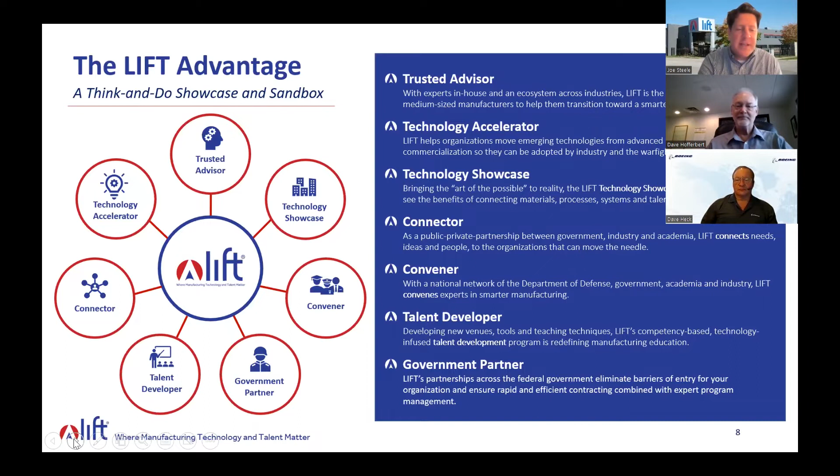Connector and a convener, thanks for joining us today. That's why we are here, to bring the best and brightest minds together. Talent developer, we already touched on that, but again, making sure the advanced manufacturing pipeline is healthy and robust moving forward. And finally, a government partner. It can be intimidating or overwhelming for folks to begin working with the federal government. Dave Hofferbert from Bond might be able to comment on that. But we like to serve as that conduit for folks to begin working with the federal government.

So that is Lift in a nutshell.

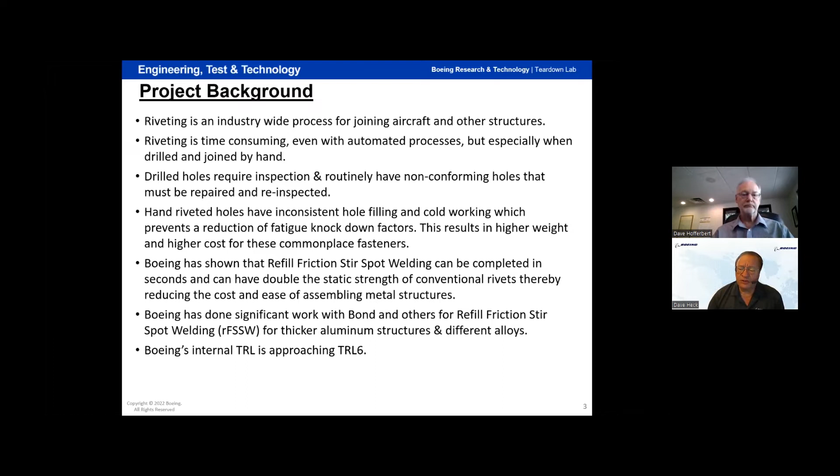Let's see. So our project was, we want to look at other applications that are more military focused. Again, there's lots of places on lots of airplanes, F-15, all the helicopter programs, and some of the military derivatives like the P-8, which is a 737 derivative, and KC-46, which is 767. So what we wanted to do was find a target component that we could actually transition this technology to.

So in the ranking of parts that you use as candidates, you usually start with doors and removable things for your first entry level transition. That way, if something goes wrong with the process, even though you've vetted it and done all the testing, they can just take it off and put a new one on. And then you go into secondary structure, and then into primary structure, and then you get into that higher criticality level stuff.

We don't really think friction stir spot welding will be in anything in the critical section, because those are usually titanium or stainless steel or other fasteners.

So we did development of weld parameters. We really wanted to check how fast we could go from weld number 1 to weld number 2, 3, 4, 5, and 6. We'd seen some data from other partners that have worked with us, including Bond, who's worked with us for a while, just to see how fast we are. Some of the previous data we saw was maybe 6 seconds per weld, which is close to how fast we can drill holes with an automatic machine, but we certainly cannot go back and rivet those holes, even automated, in that total amount of time. So right off the bat, it looks like it's at least equal.

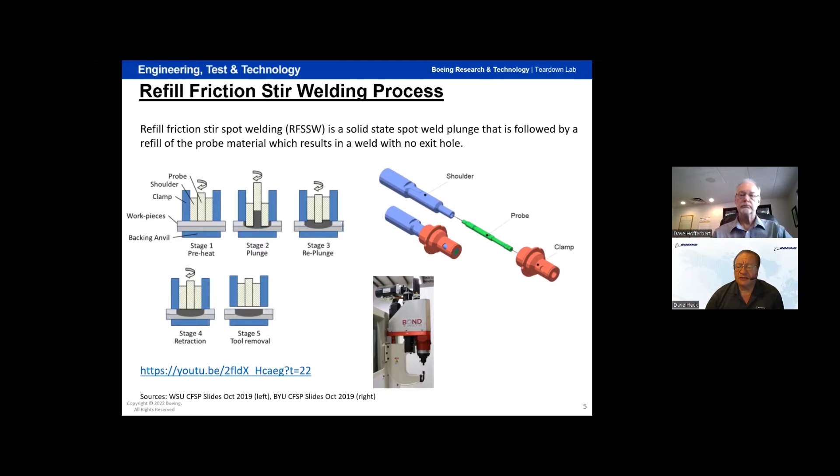But it's got obviously rivets all over the place. It's got some pin and collar, like nuts and bolts kind of fasteners too, but the ones we chose were obviously the ones that are just regular rivets. We looked at other applications too, again looking at low criticality parts—doors that come on and off, metal flaps, etc.

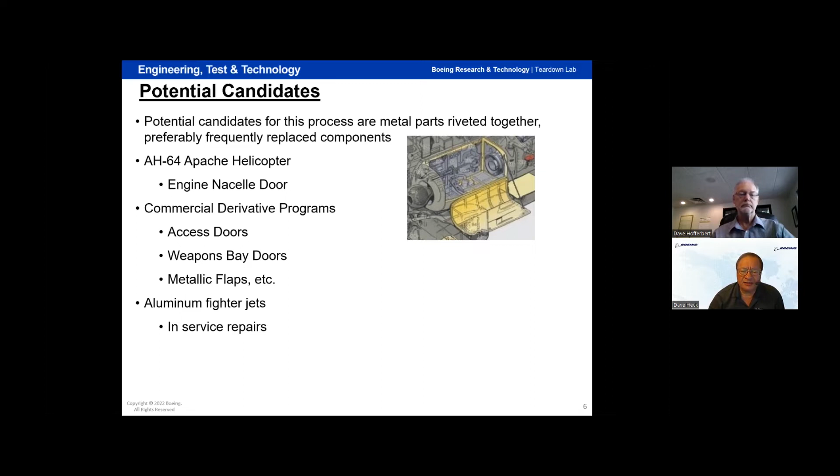There's also some teams looking at in-service repairs of aluminum skins on fighter jets and whatnot, where you can go in and just push a new piece in and not only do the weld, but also fill any cracks or anything like that. But that wasn't part of this.

So again, I kind of talked about this a little bit. This part's double contoured, so when we do it, it's going to need to be robotic. A little bit of a challenge, but we're pretty sure we can do it—we've done all kinds of things with robotics.

The outer skin assembly—you're looking at the actual inner skin, but once the door is closed, just the outer skin has 516 rivets, which really isn't very much. There's hundreds of thousands on commercial airplanes, so the more rivets you can get to, the better. So if we show a positive business case with this, then other portions of the structure of the helicopter open up as possibilities, as do other aluminum helicopters like the Chinook.

So I'm going to pass this over to Scott because this rapidly gets out of my wheelhouse with this.

So Scott, go ahead. No problem.

As we're doing this program, it's a smaller, shorter program, so we wanted to quickly get a bunch of details out of it. We used a design of experiments to throw a bunch of parameters out there and figure out what the best options were.

Rather than just doing a single spot, we made it on a 10-spot coupon, so we can see how these plates manage as we're going down the length.

So we used 4 variables. We either skipped 1 spot or 2 spots to let that heat dissipate as we were welding. Then we used the RPM to adjust the heat input. We looked at different plunge depths to see how far down we're going into the lower sheet, which can affect both your lap strength and how much heat you're putting into the surface. And then a tamp depth, which is, after the initial weld, you push down a little bit just to make sure everything is solidified and gives you a nice clean surface at the end.

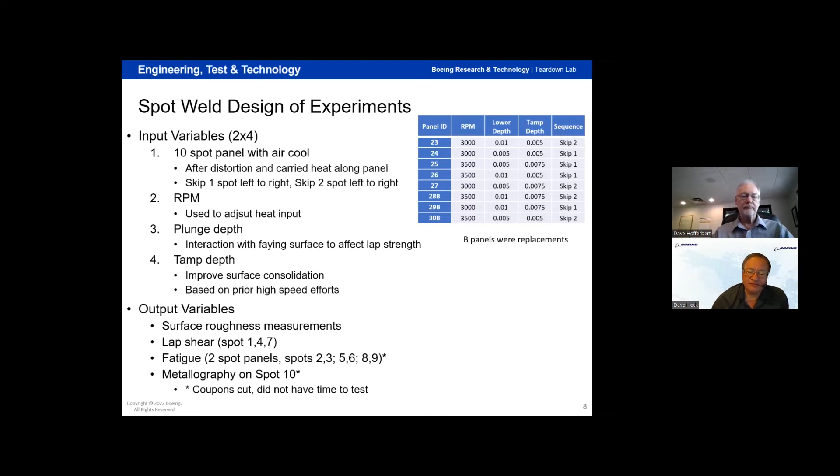Okay, there you go. Oh, look at that. So as Dave was mentioning, these are 7075 and 2024, but very thin. You have 50 thousandths thick for the total thickness where you're putting the weld or the rivet.

So these were done with a 9mm, or 0.354 inch diameter, tools that were spaced 1.2 inches apart, with an edge distance of 0.6. We're trying to keep a lot of the same parameters when you're doing a rivet replacement, so keeping an edge distance, looking at your overlap and your spot spacing. These all equate to at least 2D and 2D for edge and sheet overlap, as well as a 4D spot spacing, again for a 032 to 020, so pretty thin material.

So it can be susceptible to a lot of the other properties that we're messing with. Just to showcase, as we're stepping down to do the lap shear and the fatigue.

Go ahead, Dave. And those sizes that Scott mentioned, the edge distance being 2 times the diameter and the rivet spacing being 4 times the diameter, that's typical values for aerospace assemblies. Twice the diameter edge distance gives you the best fastener bearing stress allowables.

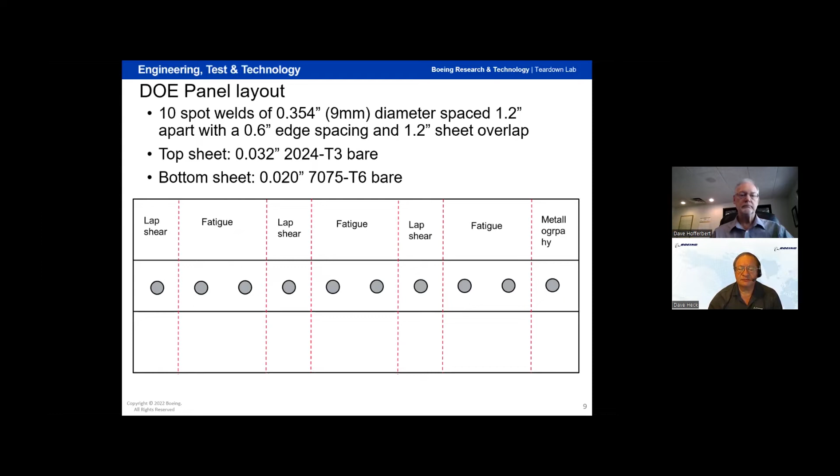As mentioned a couple of panels back, we did have to do 3 repeat panels, so we were doing these in rapid succession, one after another. We did get some buildup on the tools, which caused the touch point to be off. This is doing research and trying to push it into full scale production really fast, so you see some things like this, but we were able to go through a procedure and make sure.

You can just see what the tools look like, both cleaned and before they got cleaned. But we could do this in process as well. So those final 3 panels were able to be run without any issues, just running some additional cleaning trials on the tool itself in process.

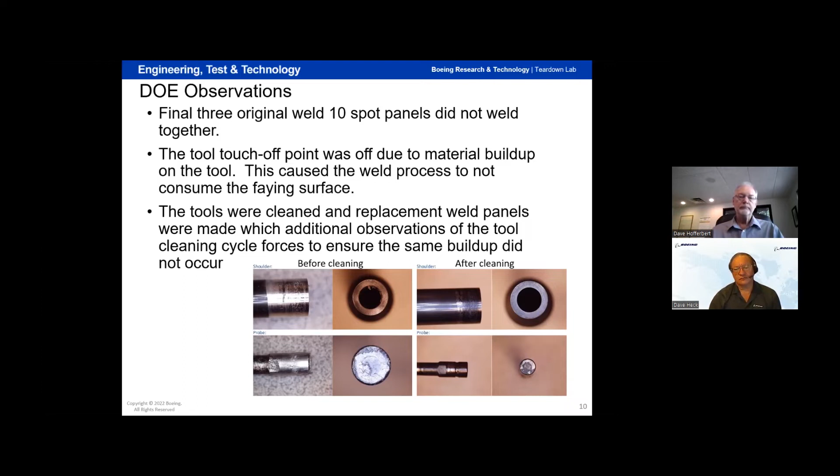So we were able to, starting with the surface results, surface roughness, we measured the bottom sheet, the bottom of the bottom sheet, which would be equivalent to the side that sees the air flowing past it. We measured the surface roughness both in the length of the weld and across, so we do essentially a plus sign on the back of the weld.

All of them were within 125 microinches, which is a typical requirement. Most of them were under 63 microinches, and even under 32 microinches. So pretty much as flat as you would have a normal sheet that would be delivered to you, sitting around at 32 microinch surface finish.

Running through the statistics, we didn't have enough panels to get interactions, but none of the variables we looked at really drove one way or the other for surface roughness. So if anything, we just saw there was no buildup - as we went panel to panel, we didn't get heat buildup to cause extra surface roughness. It was good to see that it was not affected, but we could still get surface roughness that met what the blueprint requirements were.

And then for lap shear, we were able to do the first set of panels. We were able to get all those pulled for the lap shear strength. The repeat panels were unable to be pulled before the end of the program, so we weren't able to do a full statistical analysis. But even looking at what we did get, we got at least 2.7 times stronger than the blueprint riveted joint.

And if we throw out a couple of those panels that didn't perform as well, we were able to increase that average up to 505 pounds per weld. Quite a bit of a jump in the shear strength of these, and these are material to material - no rivet head there to help you, no actual rivet there. So we were able to get some pretty good strength out of this process. But we weren't able to get the fatigue or the lap shear testing completed for the statistical analysis.

So another thing we did, we wanted to talk about speeds. How fast can we go? One thing we were trying to do is, how fast can the individual spot welds go?

Bond's process engineer worked on that and tried to increase the speed. He was jumping up the individual feed rates of different parts of the spot weld up 10%, 25%, all the way up to 100% - so full 200% speed of what he was commanding the machine to do. These travel speeds, 420 millimeters or 240 millimeters per minute, were the feed rates for the individual plunge sections of the weld.

I didn't really see any differences in the forces that were being exerted on the tool or the surface finish on the backside. If we go to the next slide...

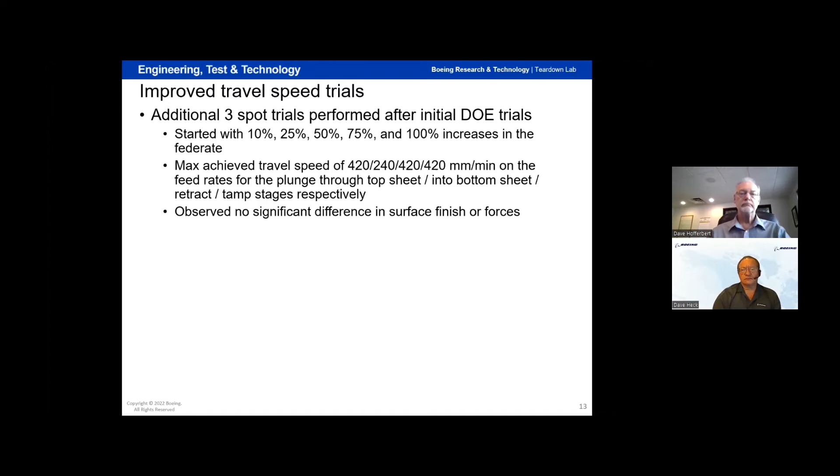What he saw was that the original DOE welds were about 1.2 seconds long start to finish - once you start plunging until you're pulled out of the part, was 1.2 seconds on those first DOE welds. When he increased to 200% speed, he got that down to a whopping 0.98 seconds. So we did get a 20% increase in speed, but again, it was still about a second long, which was much better than the 6 seconds or so that we had stated earlier.

A lot of what your time is going to be is going from spot to spot. So positioning the robot and putting it in the next spot is going to be more of your time than the actual spot weld itself.

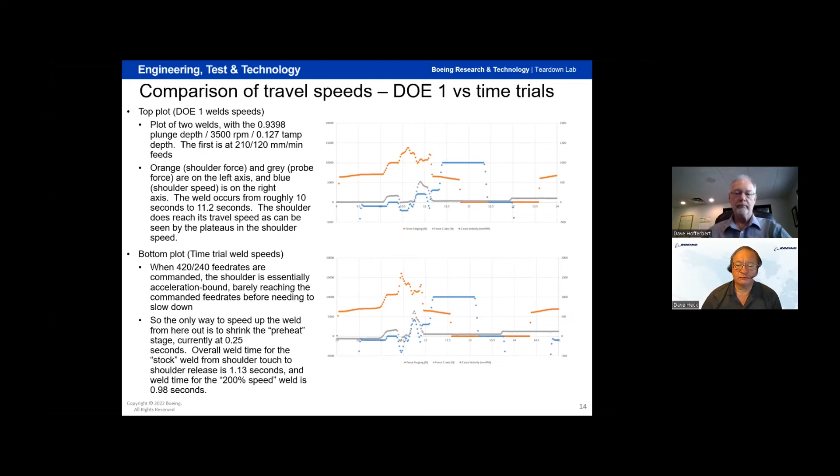Okay, so back to me. One other thing about that discussion, or the statement Scott made about the robot speed.

Typically, these holes aren't very far apart. So if you look at the 4 times diameter spacing, if the hole is 0.35, 4 times that is 1.4 inches. So the robot doesn't have to move very far. We don't expect that to be more than 2 seconds.

So looking at that rate, clearly we've drastically reduced the time it takes to rivet. We do it much faster than it takes to drill a hole. So I think it's got a lot of potential for further work and applications all over the place.

So anyway, I made a cost model for this. Part of my time, in addition to being a metallic processes application engineer, I've been spending time helping a team we call the Teardown Lab, which does the same kind of thing automotive companies do. We buy products from those other guys, and also our own products, and take them apart, look at them, see how they're designed, how they're fabricated, and then do cost estimations to see where their cost really is and compare it to ours.

If theirs is cheaper, why is it cheaper? If ours is cheaper, why is ours cheaper? And what the design benefits are.

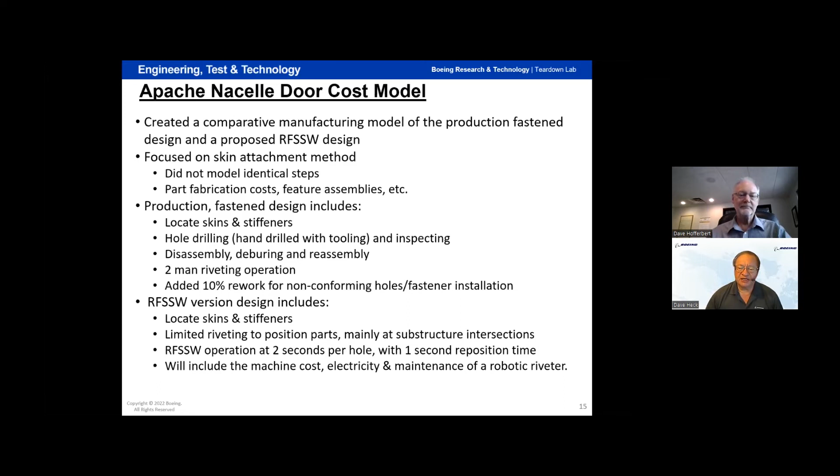Especially the discount rate that Bond's going to give us when we buy these from them - but the cost of robots, electricity, maintenance, everything that goes into the true cost of that device. So the method we use during our teardown cost modeling is very much bottom up. We look at washers, rivets, everything you do to make that part, including inspection and NDT and that sort of thing.

So for the riveted version, we had an internal tool that lets us estimate how much it takes to load particular parts in the fixtures, how much it takes to drill, deburr and everything else, and then install the fasteners. So for this case, the assembly cost for those 516 holes was

$2,170, which isn't a big number. If you're making 200 of these, it becomes a little bit bigger number, but for this limited part, it's kind of what we expected.

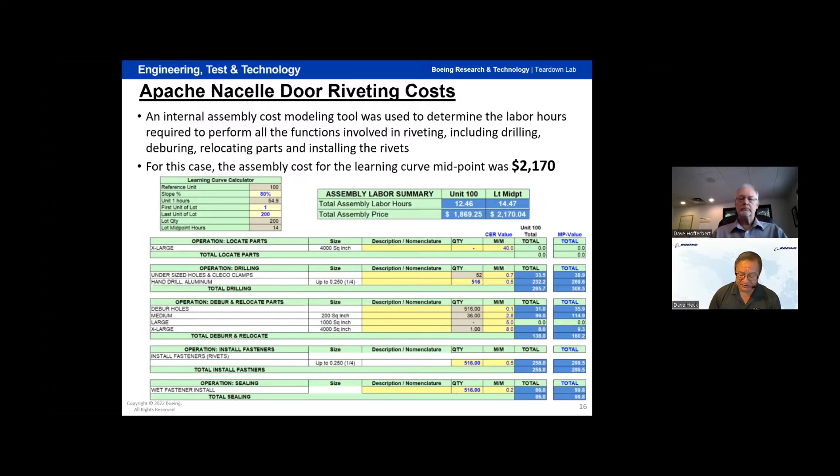We roll all this information up into, excuse me, another program called Cleansheet, by McKinsey. That lets us look at specific operations and break them down piece by piece.

Again, you can look at if it was a part you're going to machine - there's a certain amount of material, a certain number of cutters at a certain cost, and a certain amount of setup time, and run time, et cetera. Then go into the inspection part - penetrant inspection, sealants, priming, and everything else that goes into making a part.

So we can specify where the machines are, what machines they are, custom machines we can customize, all kinds of stuff. So we get a really good output from this that we can change if we need to, like logistics and profit and all those other percentages. So it's a pretty good tool.

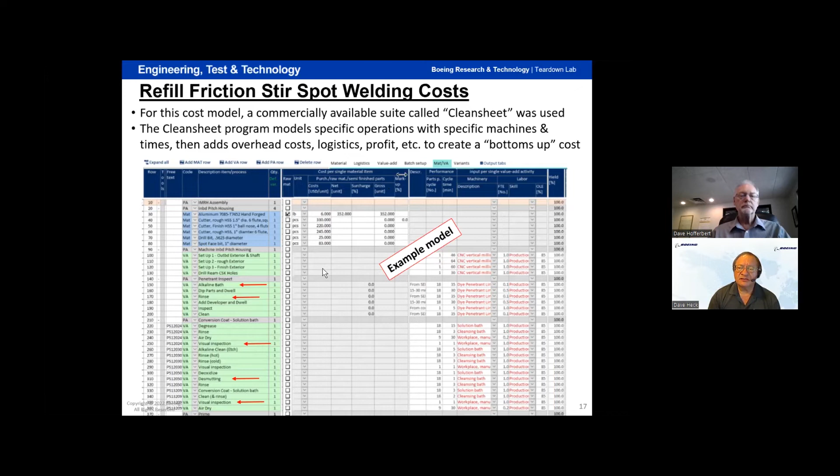So again, we looked at a weld rate a little bit faster than I said before, of 1.5 seconds, or a little bit slower - sorry, 1.5 seconds per weld plus a reposition time.

For the robot, we used a higher end automated drilling robot, and this is the specs on the robot. So total cost is $2 million. That's really crazy high, but still, this is what the software gave us, and we could go in - we didn't have time to go in and modify that to get quotes and that sort of thing. But the next system in the database below this one was well below what we needed - didn't have the lifting capability, and certainly couldn't put in the right amount of forging force.

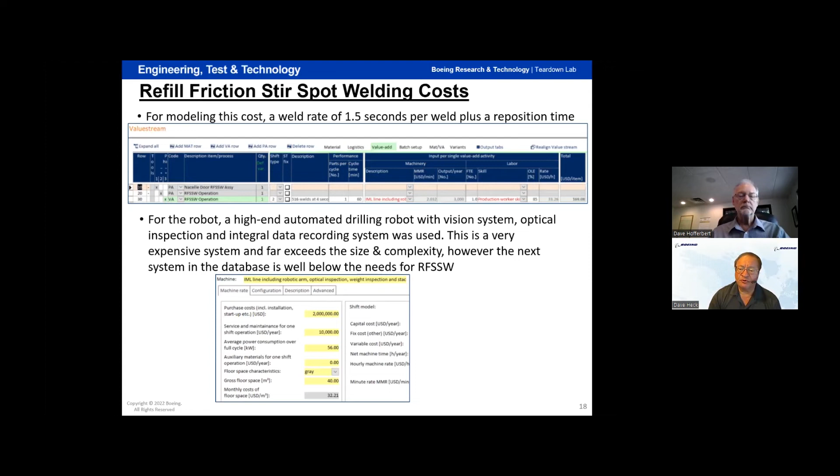So when we broke it all down, this is the way we show this. Basically, everything on this side of the chart is built up to the direct manufacturing cost, what it actually costs to do that work in whatever facility, before you start adding on all of those overheads and that nasty profit thing.

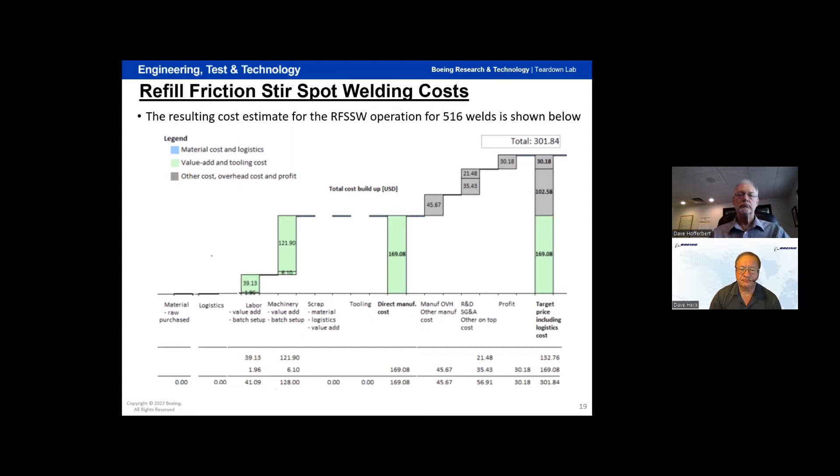But it gives you an idea of where the money is coming from. You're actually spending less money on labor and more money paying off this $2 million machine. If that machine was a quarter the price, this would come down also, because it's the amount of time you're actually operating that machine. Anyway, the bottom line came up with a total of just over $300, which, considering you're moving 2.5 seconds a hole, is pretty good. That's a pretty good rate.

So we look at the total cost of adding the welding tools to it. We came up with a total savings per aircraft, for one door on the left and one door on the right, of $3,700. And for 200 aircraft, that's $750,000. That's not too bad.

Non-recurring cost, yeah, we've got to put robotic equipment in, plus the outrageous cost that Dave Hofferbert is going to charge us for that friction stir welding head, and then time to actually program the machine to go do it. So total program savings we estimated was $650,000, which is a pretty good number for just 516 rivets.

If you look online, you can see illustrated views of the Apache, which is the one with the pictures of the door. You can see all the rivets in the tail and other places, so there's thousands of rivets. So this number could get to be $3 million per ship. Well, that's a big number.

That's a good savings. Now, granted, we make our profit based on a certain percentage of the sales price, and there's a federal limit to how much we can make. But most of our helicopters go to foreign sales, so if we can cut the price by a couple million dollars, that's going to mean we'll sell a lot more. So that's the reason why we do cost reductions, because our profit would actually decrease a little bit.

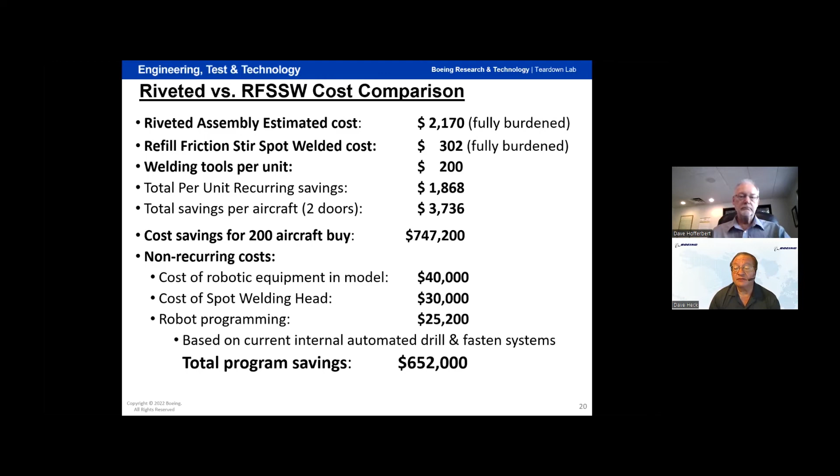So let's see what else I have here. A few more comments on the model. Rivets are pretty cheap, a few dollars a pound, and there's a lot of rivets in a pound. But again, as we talked about, in the tail boom skins there's over 3,000 rivets.

So we're usually looking at 2 million savings for that. And then there are other places around that aren't as highly loaded, like the skins around the cockpit area. Anything where you get near the engine, then things get sky high.

Static loads, and the other thing we didn't really mention is the whole fatigue environment of a helicopter. In addition to the flight loads, which usually determine your fatigue spectrum, there's also that constant thumping in the background of the rotors going around and the tail rotors spinning, which drives that fatigue stress even higher. So that's something we need to look at: how it behaves in a combination of high cycle vibration plus varying flight loads.

And then we also need to do a larger sample of the weld speed test just to see how fast we can really go. I mean, you do 10 welds in so many seconds, that's great. Well, now you've got to do it not on a flat pan, but with 5-axis motion with a robot with an offset, moving from here to the other stringer or whatever, and the numbers might go down, but I still think it's going to be a really high cost savings.

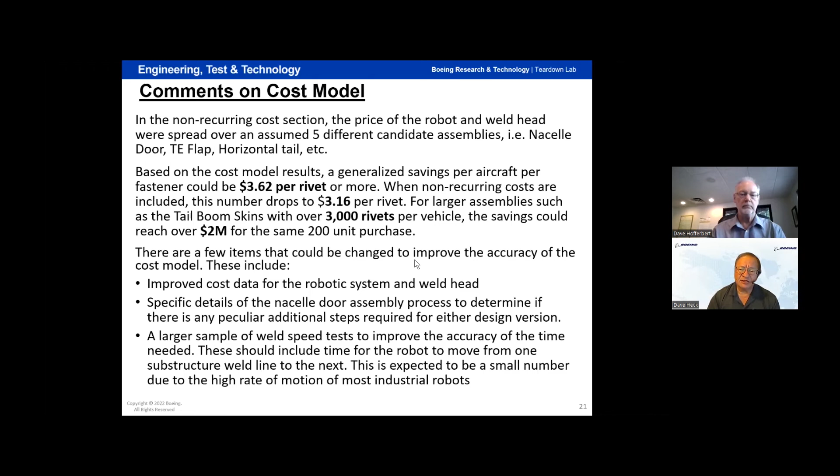So the follow-on program I talked about earlier, we want to move this up to where we can actually put it into production on a military unit. The proposal we put forth was to actually make a full-size set of skins on a real metal tool that would provide the reaction for the forging forces, using actual parts that we'd purchase from our supplier. I think at one time we were buying these parts from Poland.

I don't remember where we are now, but again, to go and fabricate a full-scale demonstrator and do more tests and everything, we were thinking it'd be like a $1 million program. Given that we're doing a new Apache model, that might be something we can squeeze in, maybe twist the Army's arm, get Lift to help us twist their arm. Hint, hint, Joe.

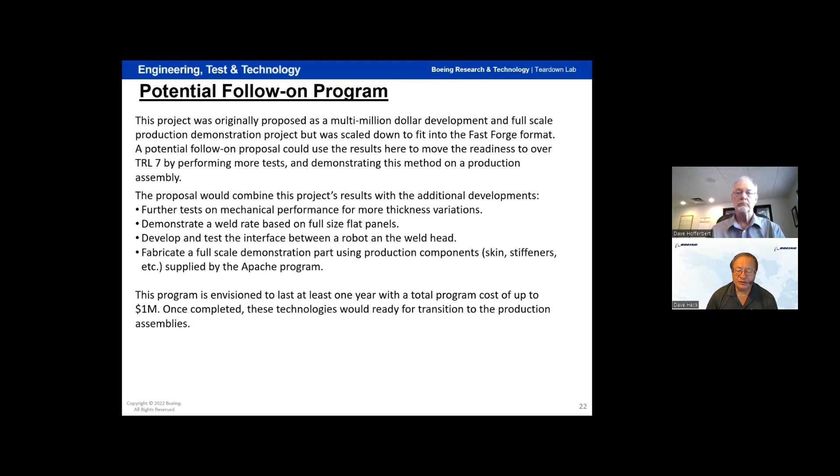So again, what we showed was that we can weld very thin materials without—I don't think we talked about the warpage at all, I think we left that part out—but the big concern was as you spin this tool and push into the materials, the concern was that the material is going to buckle and wrinkle from the torsion. We didn't see that at all, which is good.

The strength numbers are really good, and again, we can achieve a pretty significant cost reduction just for this part, these two parts. If we go to more parts, then we get more savings and could start looking at a pretty significant cost savings.

The other thing I'll say briefly, I know the automotive industry has been looking at this. I don't know how much work they've done, but 2 seconds a weld—I don't know what the typical weld cycle is for door assemblies, or body assemblies—but this sure makes a big competitor that you can go in and just pop it in. You don't have to bring a whole bunch of electricity. You don't have spatter and the big heat affected zone and everything else that you'd find with a normal weld. So I think it's got a lot of possibilities, and we certainly are going to be taking it further internally.

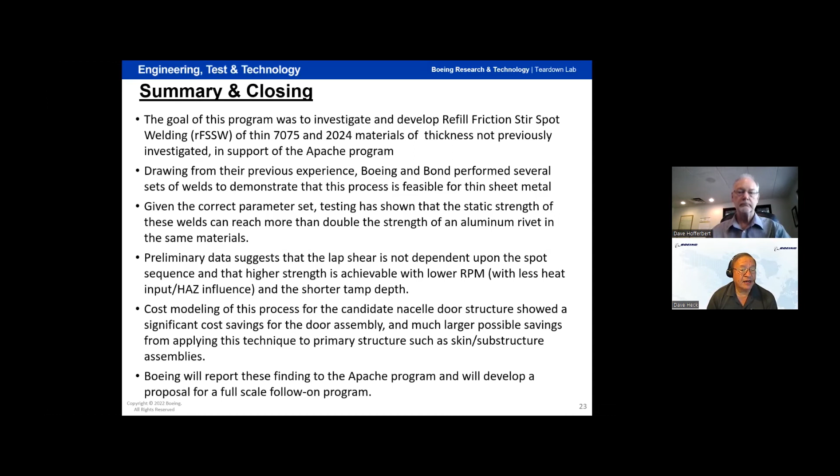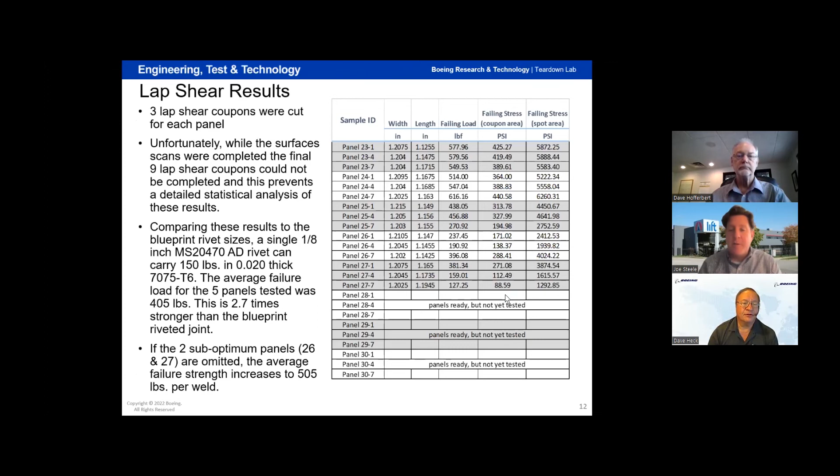Thanks for that, thanks for the presentation. As I mentioned, this was a really interesting project for us to be involved in, and for us to see what you guys had cooking. You answered one of my questions, which was other industries that this might be able to enter into, whether automotive or other places where rivets are needed, might not be needed anymore with this new process. Could potentially be—I mean, you're still testing it out, certainly you want to take it further—but do you see a possibility for high speed, high volume opportunities for a process like this?

Yeah, I think if we can—well, I'll let Dave Hofferbert talk to that because he's the guy that did the actual tests about speed and large number of holes and whether you can maintain a good rate, etc.

The cycle time is actually on par with resistance spot welding and self-piercing rivets if you go through the full cycle time from joint to joint. Not quite as fast as resistance spot welding, but certainly well within the ballpark to be of interest to the automotive folks.

The other thing is that the benefits over rivets, particularly self-piercing rivets like you see in automotive or aluminum body structures, is that you can use the same tool set for various material thicknesses and just change the process parameters to accommodate different thicknesses, whereas SPRs or self-piercing rivets require a different item number depending upon the thickness.

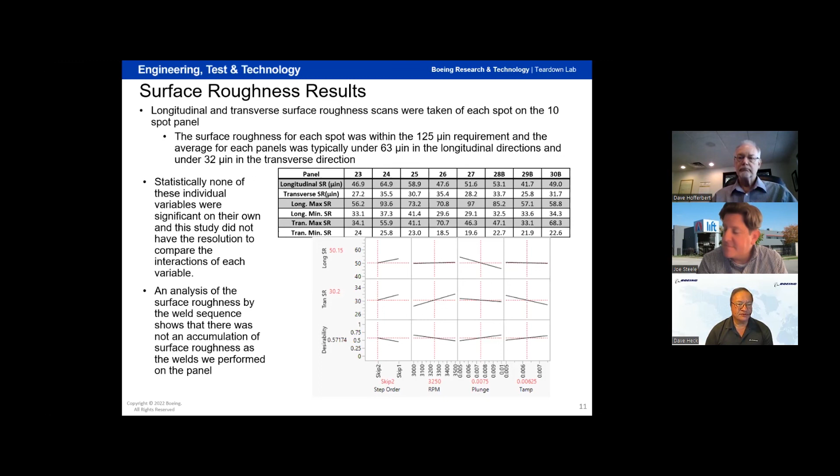I think this is a technology where the path to raising the TRL and MRL levels is fairly well defined. So it's a matter of funding, turning the crank, doing solid engineering, gathering and analyzing the data, and organizing it. I think you'll be surprised how quickly we can move this into a viable, reliable production process.

I probably should stop talking after this because we've run out of time. As an engineer myself, I get the point that a huge amount of de-risking has already happened here, and I can see a path forward. I'm not the expert, but I'm sure you guys can look at this and say this is pretty risk-free at this stage, and we just need to go through the normal engineering processes to verify and validate what we have here, create use cases, and away you go into commercialization.